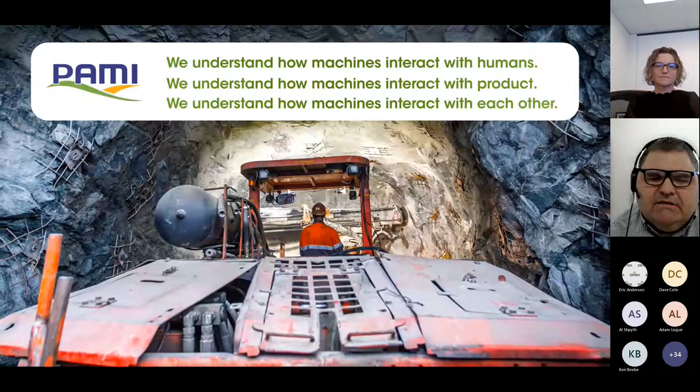PAMI offers machinery and process problem solving across a broad range of industries. PAMI works directly with mining companies as well as companies supplying machinery to the mines. We love challenges. Clients partner with us to be an extension of their R&D team, be an independent third-party validator of their product, provide additional support to product development and design teams during peak workload periods, and be a one-stop shop to design, build, and test for entrepreneurs.

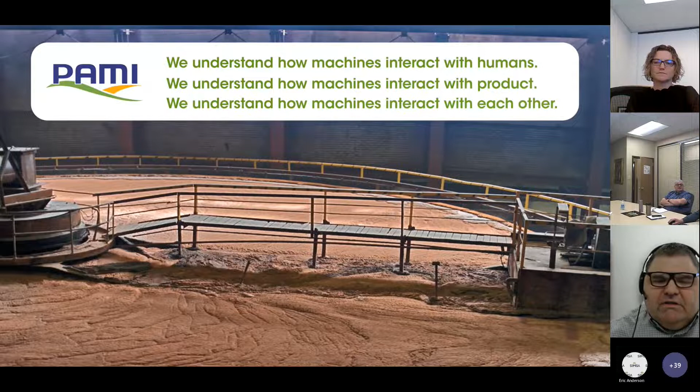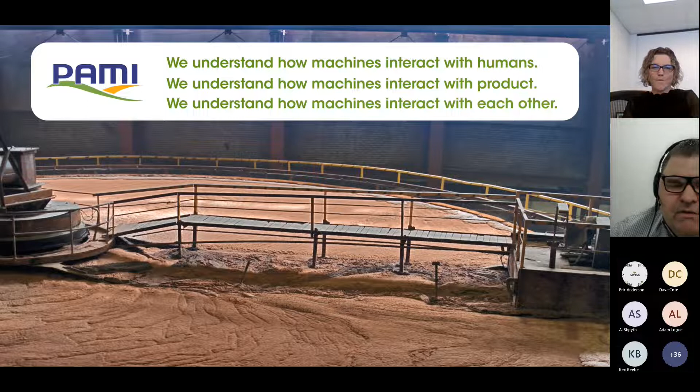The PAMI approach is different than most. Our scientific research approach, coupled with our hands-on lab and in-field testing, ensures practical solutions to real-world problems. We employ scientists, engineers, fabricators, electronics specialists, and more. We provide the complete solution from concept to completion. We provide creative engineering and design services that are governed by a disciplined, evidence-based approach. This approach has been proven over 46 years we've been in business.

PAMI's recently undergone a transformation, evolving and focusing on three strategic industries: mining, transportation, and of course, agriculture. Our strategic plan guiding us over the next several years is focused on 5 themes: establish and be a center of operational excellence, maintain revenue stream diversity, be the recognized voice of agriculture, strengthen relationships with customers to enable stronger revenue base, and grow agriculture revenue.

These strategic directions will ensure PAMI will remain a vibrant, flexible, highly capable service provider for industries in Saskatchewan and Manitoba well into the future.

With a new strategic plan in place, PAMI's reorganized our people with a goal in mind to maximize the value to our clients. Our business development team currently consists of 3 experienced professional engineers who work with clients to define the scope and deliverables and secure projects. The BD team continually validates the needs of clients to ensure PAMI is offering relevant skills and assets to serve clients efficiently.

We are the voice of the customer to the rest of our organization. The business enablement team is our back office, so HR, accounting, and IT. This team monitors and reports on performance of the organization.

When you become a client, you'll work directly with our operations team. The operations team is comprised of a dedicated project management team, currently of about 5 people, and a technical service team, which is about 25 people and grows up and down as needed.

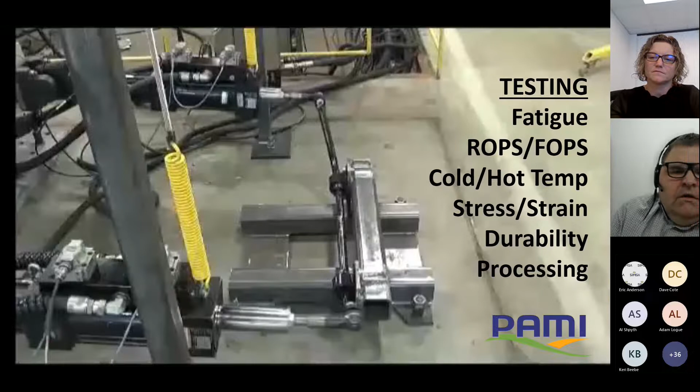This is an example of a fatigue or durability test using our MTS Flex test system at Portage la Prairie. The drive file for these types of tests can be from an SAE, ISO, or other standard, or can be based on real-world data collected from strain gauges and accelerometers on an actual vehicle or machine.

A major advantage to working with PAMI is the ability to test and prove solutions in-house. Within PAMI facilities in Humboldt and Portage la Prairie, PAMI can conduct head-to-head performance testing, in-field product validation and verification, durability and fatigue testing, safety compliance testing, material handling, flow loss analysis, protective structure testing, i.e. ROPS and FOPS, hydraulic cylinder performance testing.

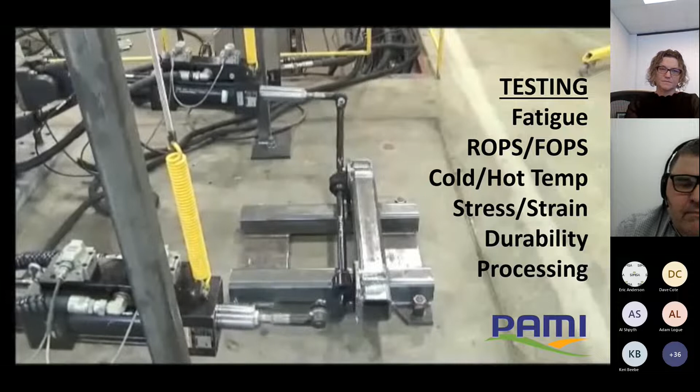On the transportation side, PAMI has tools and facilities for brake performance testing, seat and seatbelt anchorage testing, rear impact guard testing, tilt rollover stability testing, engine performance measurement, alternative fuel performance and emissions analysis, data collection, vibration, accelerated life testing. We also have 2 climate chambers, one large enough to fit a highway motor coach with a nominal operating range of -40°C to +40°C. And we also have a 20% grade brake test slope.

As mentioned in the beginning, PAMI is a fee-for-service organization, meaning that the clients pay us to conduct projects for or with them. However, some of our clients who are considered to be SMEs, small and medium enterprises, may be able to receive financial support through IRAP grants or other government programs. PAMI is well known by most of these grant providers, and our project costs are typically deemed to be eligible for grants requiring an R&D investment.

If you have an innovation you want to work on, but need external funding in order to drive it forward, talk to PAMI and agencies like NRC IRAP about options.

And lastly, before we turn it over to Ian, a reminder, PAMI does not retain IP. PAMI is here to help clients succeed. If we work on a project for or with you, any IP that results from our work will belong to you, the client. We can even produce drawings and documentation on your templates or in your formats if that's helpful. Raw data and CAD files, etc., can be yours if you want them and can use them.

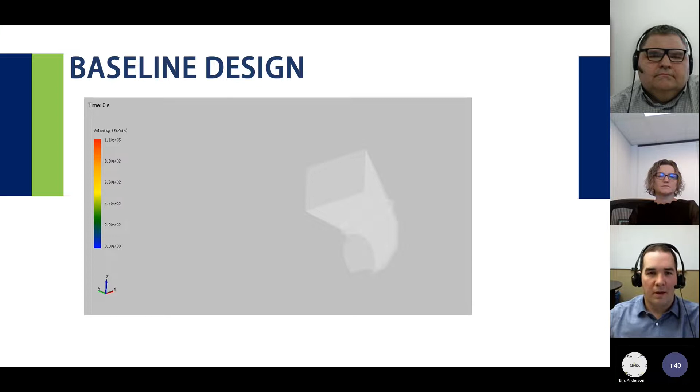So today I'll be talking over a couple case studies that look at de-risking design changes to in-service equipment in particular. That's often the case in mining, as well as understanding equipment performance in sometimes quite challenging environments and what we can simulate there. So the first case study that I'll look at here is looking at material flow, and material flow issues and wear are certainly commonplace in agriculture. And so it was really a natural evolution for PAMI to be looking at this kind of work in mining as well. So this is a 90-degree transfer point that a client had in service that had a lot of historical dust generation issues.

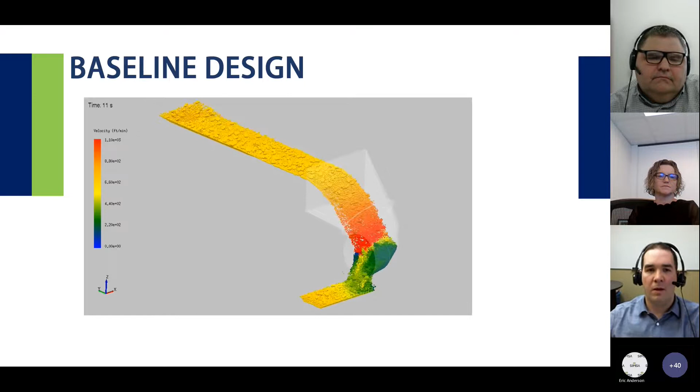So we can see here in the DEM simulation, particles entering; the coloring is based on material velocity. So we can see acceleration and material stopping and then re-entering. And I'll get into the design improvements in a minute here, but we started with the baseline design, even though we knew it had issues, to get a deeper understanding of the problem that was there, and so that we can have a lot greater confidence in the solutions that we propose.

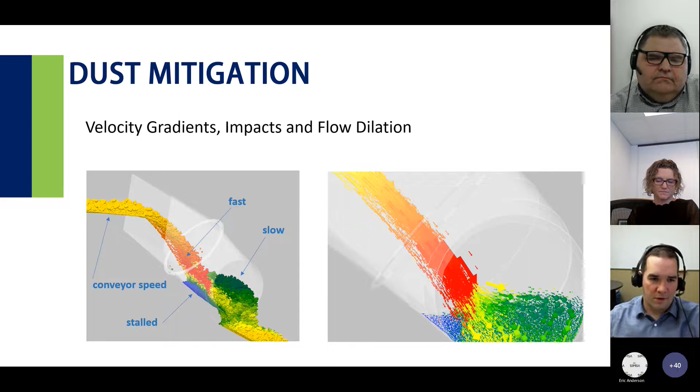So when we're looking at dust, what we want to be avoiding for a transfer point is things like sharp velocity gradients, so suddenly stopping material, impacting material on the structure around it, and then having changes in flow dilation, we call it, or having it open up. And certainly some issues with this current design here shown. But again, if we can understand where we're starting from, we have a lot higher confidence in solutions down the road.

Now, material handling isn't just about material flow. We also want to understand the impact, literally sometimes the impact on a structure, but how the structure is affected, particularly in terms of wear for a long service life component like a chute. And so we're able to simulate and measure, even just in relative terms, wear in DEM simulations as well.

So same chute, we've just clipped the particles as they enter here and they kind of reappear at the bottom. And the coloring that we're looking at in this simulation is a wear metric that's contained right within EDEM. So we can look at this sort of as part of the whole modeling process.

And this was really interesting because this particular hotspot that was a concern in the simulation agreed really closely with the anecdotal comments from the maintenance team at site as to where they're constantly welding in repair patches. So it's always good to have that confidence gain and check that correlation box early in the process.

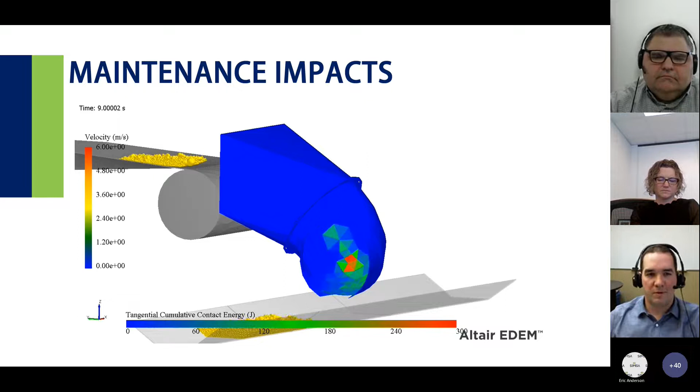So after getting a good understanding of the baseline problem, it's, as Larry said, very much a collaborative design process with our clients often, and we want to leverage their expertise and be an addition to their team. So several design iterations later, we came up with a few concepts, one of them being shown here, and we can see a lot less disruption to flow.

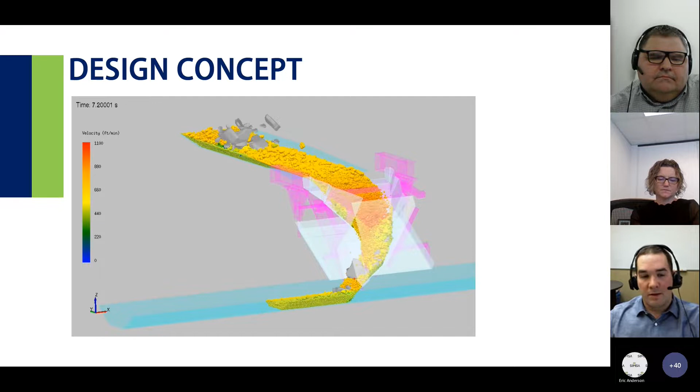The other nice thing with EDEM in particular, it's quite a high-end DEM package, and we can do a lot of different things in terms of material modeling. So here we can inject more and more larger particles to look at plugging, changes in material properties if we've got, say, a wet cohesive material or something like that evolves through a process.

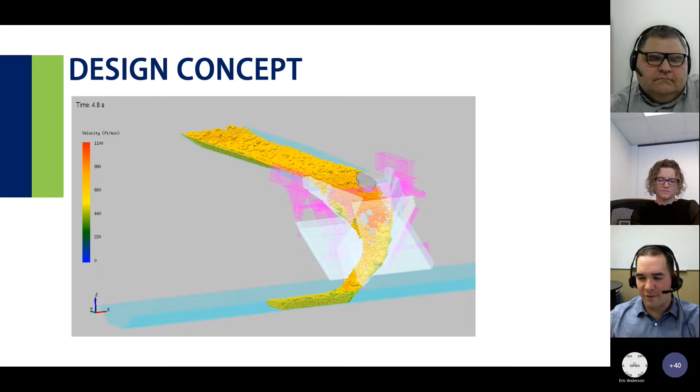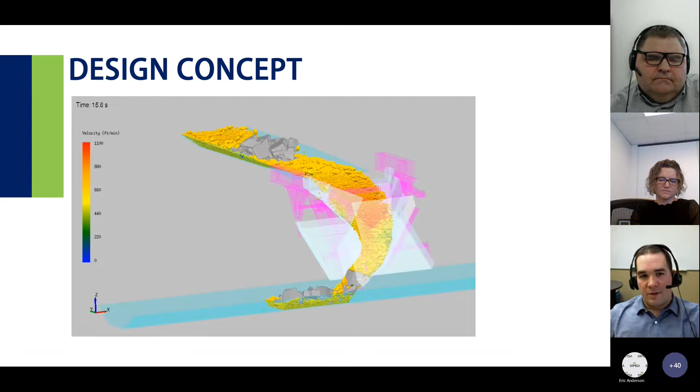This was kind of a fun project, and we ended up doing an inline chute instead of the 90-degree after this. And at that client, originally that inline transfer point, they had a lot of maintenance concerns, as they were having to muck out transfer points quite regularly.

And after several months now of operation with this improved design, they really haven't had to maintain those transfer points at all. So even though we're predicting relative improvements often in simulation, it's great to see that correlation, and that's what we're going for, those client wins in the end.

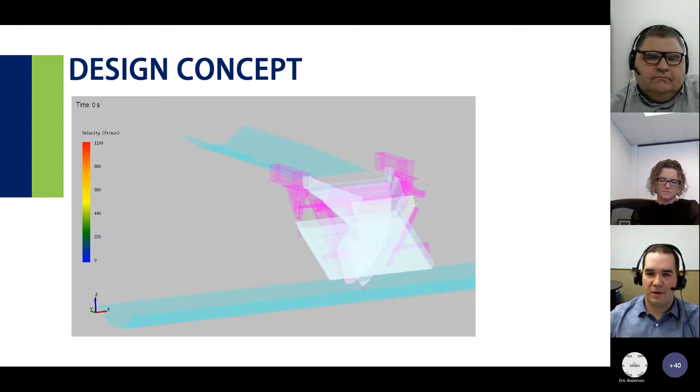So as well, another example, just looking at material flow within transfer piping. This is more on the processing side or maybe in a mill, but again, we can investigate early on what the flow characteristics are, and if we're looking at maybe a brownfield change at an existing site, whether we're adding instrumentation or a sampling port or having to do a piping change, right? We can know early on, are we getting the intended result?

But also, are we introducing potential issues that are maybe hard to see just in sort of an analytical analysis approach? So, plugging and spills, but also wear concerns. And so this is another wear prediction on the right. So there's actually two hot spots, one sort of at the top that's a little bit harder to see and maybe a bit less expected, and then more concern at the bottom. But again, these are things we can find out up front.

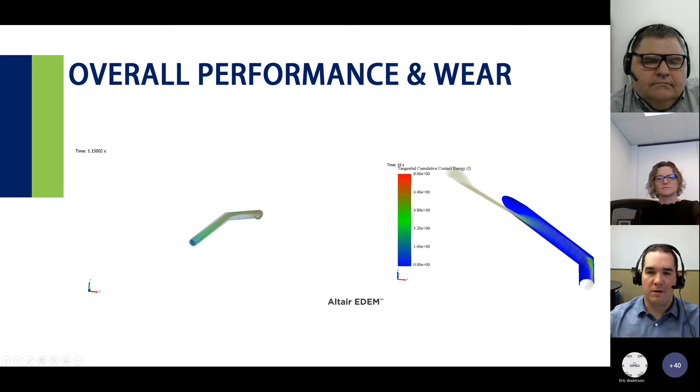The other interesting thing with bulk material is we're not just necessarily looking at flow path or velocity or bulk plugging concerns, but for a lot of process issues, we're looking at more subtle performance like material size segregation. So if we're doing sampling or looking at a material that has multiple ingredients and we're concerned about concentration difference, or maybe we have to do a material split and we want to preserve those attributes, we want to know if we're creating issues with the design in advance.

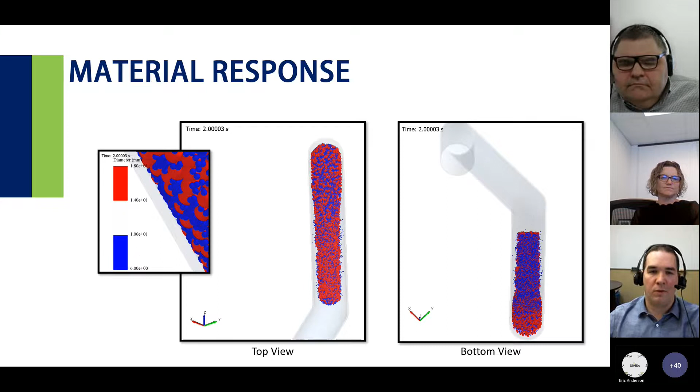And as we'd expect, as we see in operational settings, we tend to get the larger particles floating up to the top, and conversely fines sort of settling out to the bottom if we were to look at the bottom of the pipe. And that's what we want to be able to predict early on, if we have processes that are sensitive to, like I said, particle size or ingredient concentration. We want to be able to capture that, and we can with EDEM.

I'll change gears a little bit, looking more at finite element analysis. We're doing a lot of structural testing, particularly at our site in Portage with the equipment that they have there. And obviously, if we can avoid test failures and speed up the design process, FEA is the tool to use there. So we're involved with a lot of large deformation and plastic deformation analysis.

On the left, these pictures are a grill guard on a semi. So you can imagine it's quite a dynamic event when we do strike something. We call them cow catchers for a reason, I guess. But in this test, we had quite good correlation. We did the FEA, and then after verified the solution within about 1% on displacement, and that's what we're certainly aiming for if we're trying to make absolute predictions with FEA.

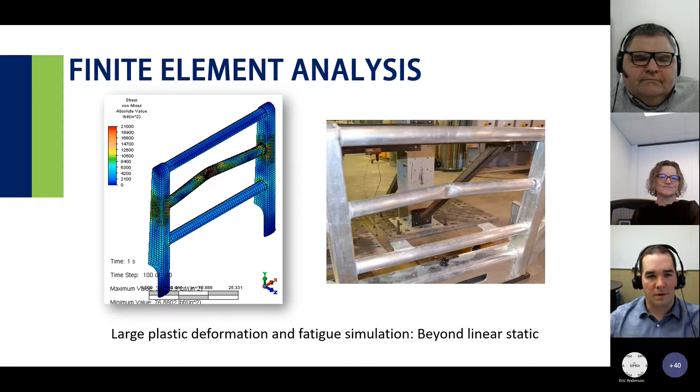As well, fatigue is certainly a concern in mining and heavy equipment. And in this example, it's a jointed rollout rig matting that can be rolled up, but the client was looking at increasing the weight of equipment running over it and had concerns about fatigue and service life length accordingly. And so we started off with a bunch of physical testing.

We actually strain gauged one of those panels, had quite a dense array of gauges on there to, again, just get a deeper understanding of the problem and get a correlation data set for, in this case, multiple soils and multiple loading conditions. And it helped to understand the modeling problem better, but it also gave us a lot of confidence in the fatigue predictions that we had in the later FEA solutions.

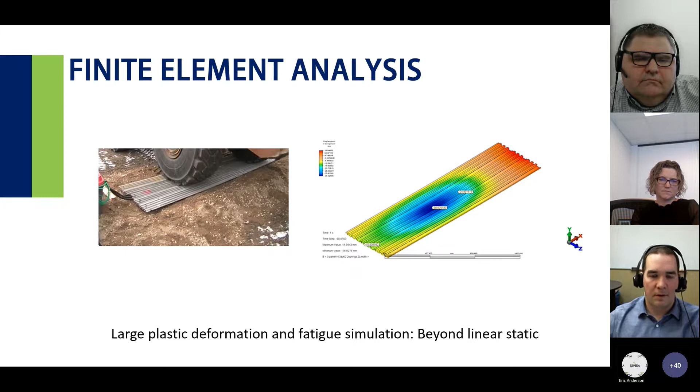So that was evaluating equipment, but also we often want to understand the environment with heavy equipment. And I'm going to borrow from some of our active ag research that we're doing here. So this is simulations of airflow patterns around high clearance sprayers. This is most of a 120-foot wide sprayer in a digital wind tunnel. And we're interested in the environment around that machine and what operational choices affect airflow patterns.

So do we have flow acceleration or deceleration in the blue? Are we creating large wakes that in spraying applications pick up droplets and wreak havoc in that regard? And I think there's a lot of opportunity to extend this type of work to thermal management in an environment setting, or looking at airflow related to dust management, or even supporting computer vision field clarity requirements for automation efforts. So that's understanding some of the environment.

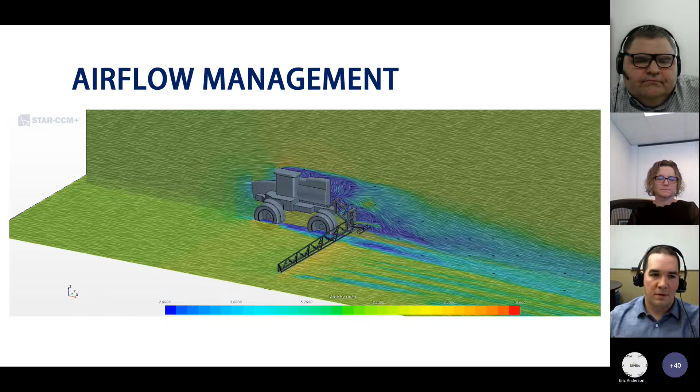We can then extend that to what is that doing on a particular process. So this is a typical flat fan sprayer nozzle that you'd see on a high clearance machine. And partway through this simulation, we're introducing a cross flow, a wind from the right to the left. So that's a side view on top, and then a view from somewhat behind that nozzle as we introduce that airflow. And the coloring here is droplet size.

So we can look at very detailed metrics and measures in a simulation to understand aspects of a given process or application approach, whatever the problem is, but we can really dive in to see, okay, this is, in this case, the class of droplet diameters that we're concerned about for drift, or this is regions of heat of equipment that we're trying to cool that are going to suffer in a heat management scenario.

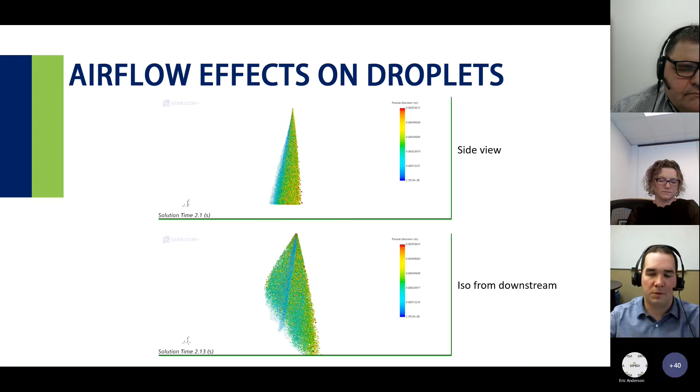And we've been able to extend that coupled simulation work to some transfer point investigations as well. So this is a DEM solution for the ore flow, as well as moving conveyor surfaces and pulley surfaces here. So this was some initial work looking at what's the effect of movement of muck and of the belt motion on the airflow patterns around a transfer point, and how does that affect things that are prone to cause additional dust generation.

So we can really get an understanding, in a design situation or in an operation situation, of what are the sensitivities of airflow or turbulence, things that we want to avoid potentially on given features of the ore flow itself, or operating conditions that we start to have a choice in. With the eventual extension to something like design improvements, or like I said, operational changes to reduce fugitive dust emissions.

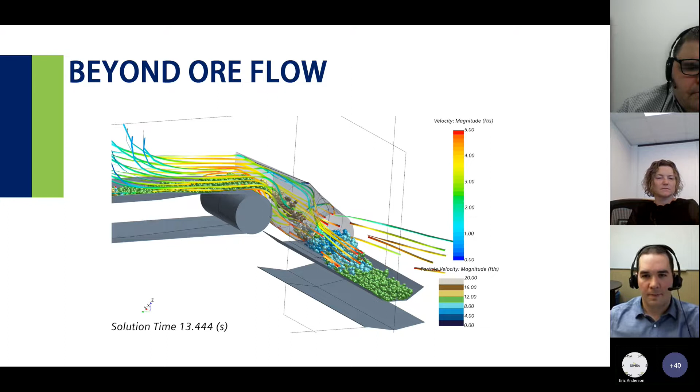So with that, I'll conclude on sharing some of the examples that we've been able to complete here at PAMI that relate to mining.

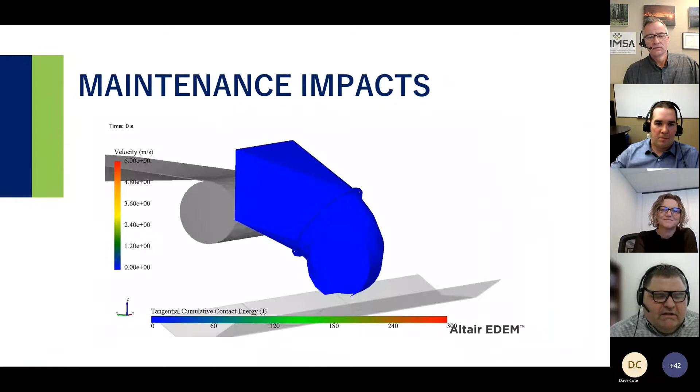Any more questions, folks? Is there any other area you didn't touch on today, Larry or Ian? I'm just going to zip back here to a slide because I think I might have forgot to highlight something. I did a dry run of this with our own staff on Wednesday, and I kind of got hammered for omitting this, and I have a feeling I forgot to fix it. So give me a second here. I'm going back to another slide.

And while you're doing that, another question came in. This is a great presentation, PAMI team. Do you work with software development for control systems for equipment? We certainly do, I would say. Go ahead, Ian. Yeah, we've done everything from supporting HMI development to shaking out bugs for implementations that are on machine already. So it's quite a wide array. I wouldn't say we're hardcore developers, but certainly the applied end of it, Jim, is where we're at.

Yeah, and just on that, we have a lot of experience with tapping into the CAN bus of different pieces of machinery. Some of you may or may not know that 5 or 10 years ago we did a lot of projects for the Department of National Defense on some of their equipment that they were having issues with. They needed some upgrades and maintenance, and we were fortunate enough to help them. A lot of that involved tapping into the vehicle's CAN bus systems and adding new functionality or finding a way to accomplish something they were having difficulty with. So yeah, we certainly do.

So what I wanted to highlight that I may have forgot to mention. On the operation side, we've got the electronics, automation and controls, mechanical and agricultural engineers and technologists, and the agricultural services. But I forgot to mention that we also have an actual physical shop where we can build things. When PAMI was created in the 70s to test agricultural equipment, they had the foresight to also build us a shop so that when that equipment broke down, not if, when, we were self-sufficient and could repair it.

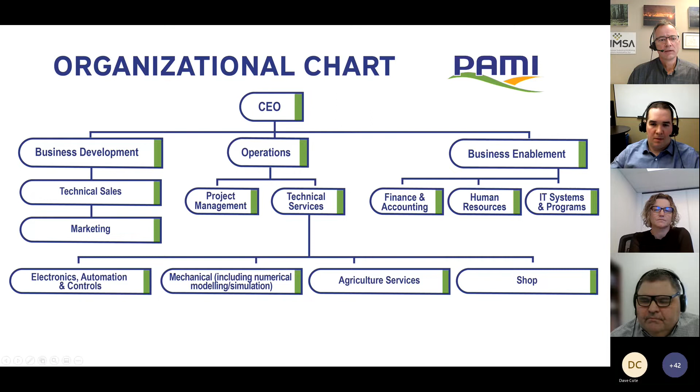Now I got 2 more things here. First of all, on your screen there's a lady there. Her name is Leah Olson. I should probably introduce her. She's the CEO of PAMI. She's kind of hanging out here in the weeds, and you're probably thinking, who is this lady? Anyway, there's Leah. Hi, Leah.

And Jim wrote, we will be following up, and great to see a service like this in the province. So good to see. Do you guys do wiring harness work?

Yeah, of course. We're actually building some harnesses right now for a client. We're not really set up to be a production facility, but it's another one of our tools in our toolbox. We can do the design work, and we're fortunate that we have a cable shop here that we can build the harnesses ourselves, prove that they work and improve them if they don't, and things like that. So yes, we do build harnesses here.

When I was on a tour of your facility pre-COVID, which now seems like decades ago, I remember being in your shop and they were building these wiring harnesses, and they were just massive. So yeah, don't be afraid to tap them on the shoulder when you need to rewire something in a vehicle.